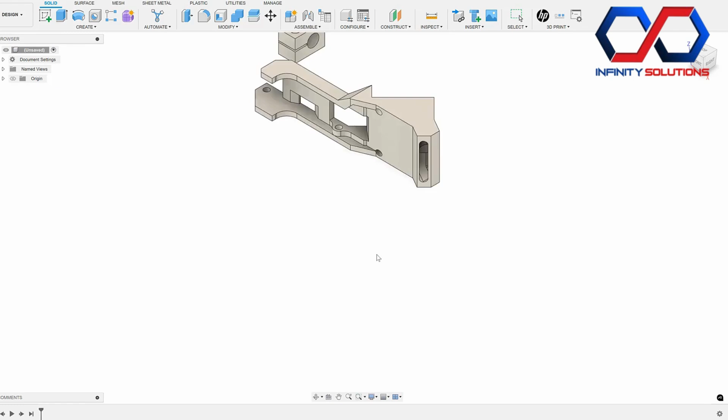So let's go ahead and start using the 3D Printing Essentials app to open multiple step files for this demonstration. So I have a handful of step files right here. So I'll pick these and hit open, and Fusion will open them in the location that they are designed. To make the visualization a little bit more appealing, I'll go ahead and turn on the component colors, so we have unique colors for every single one.

And to get a sense of which part is what, I will select this one to understand what part that is, and it looks like that is part C. So I will remember that as a part of my demonstration. And let's go back and revert the position.

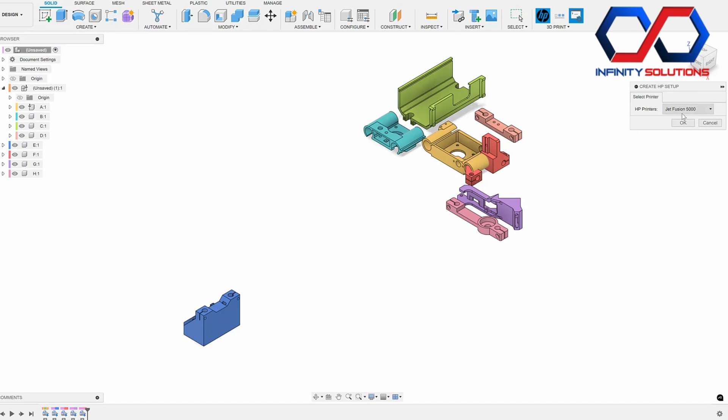So to create our additive setup, I will use the HP app and create an HP additive setup using a Jet Fusion 5000 printer. This automatically takes me to the manufacture workspace, creates an additive setup using that specific printer, and places the parts in that setup. What it doesn't do is it doesn't automatically arrange these parts.

In the past, if I wanted to arrange these parts, I would have to go to Arrange and choose one of the arrangement types, such as the bounding box, or the Monte Carlo, or even the 2D arrangement, and place these parts in the build volume. I had controls about the spacing between the parts, and a little bit about the pre-rotations, the initial rotations of the parts, but that's all the controls I had.

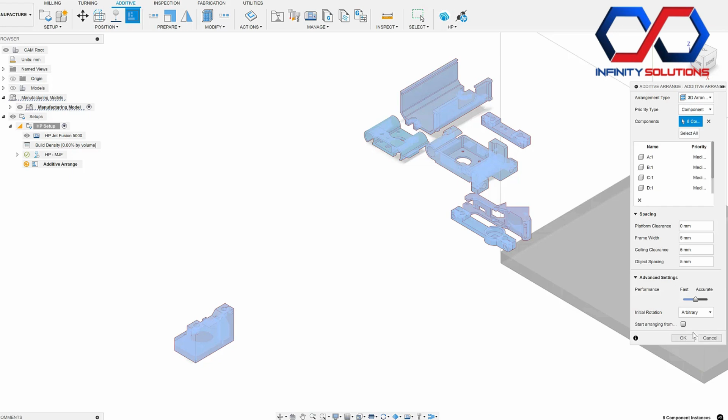And the outcome looked something like this, that I had placed the parts that I had designed into my build volume. I did not have control over creating duplications of parts or rotations of parts during the 3D packing process, which meant that if I wanted multiples of a given part, I would have to create those duplicates ahead of time and then use the packing algorithm.

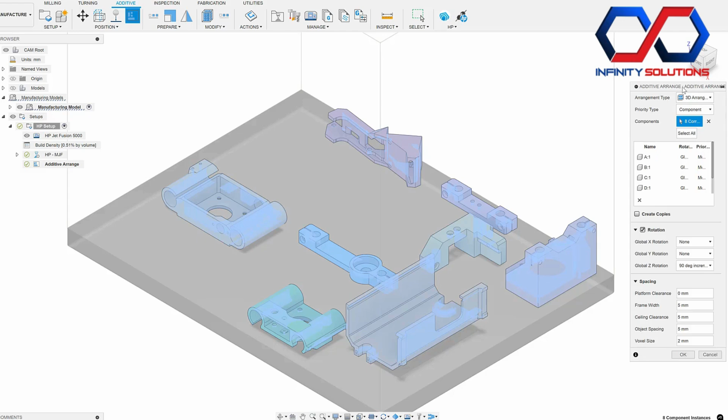Now, in this release, we have a new arrangement type called 3D Arrange TrueShape. This arrangement type is exclusively available in Fusion and has options that you can use to create copies and control the rotations. So let's demonstrate that. So the first thing is priority, and by default all parts have the same priority, but you can prioritize based on their volume. Then the highest volume object gets placed first during the packing.

For now, let's just go to individual component priority, which allows me to control the priority, and it's this part C that I'm interested in, and I'll increase its priority to high, which means it will get packed first. Next, I'll demonstrate the creation of copies. By default, let's say I want 10 copies of each part, but I can override a given part, and I can say, give me 30 copies of part C.

Simultaneously, I can control the rotation during packing, and I can try different rotations. I can say the parts are not allowed to rotate in X or Y, but they're allowed to rotate in Z with an increment of 90 degrees or any custom increment that I want. So for example, let's say 20-degree increments on Z is okay, but parts are not allowed to rotate in any other axes. I can also customize the rotations for a given part or a selection of parts.

So let's use this part C again as an example, and instead of using the global rotations, we will say custom rotation for that part. And I can also say no rotation for another part. So I can control the rotations of given parts explicitly. If I customize the rotation of a given part, I can select that part or multiple parts, right-click, and edit, which brings up a new dialog, which lets me control the rotations of a specific part.

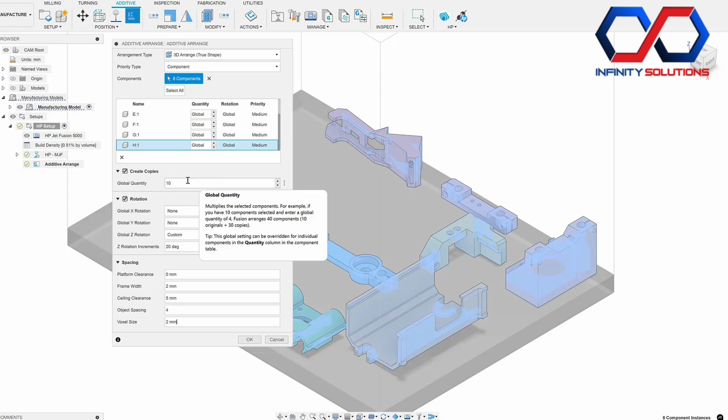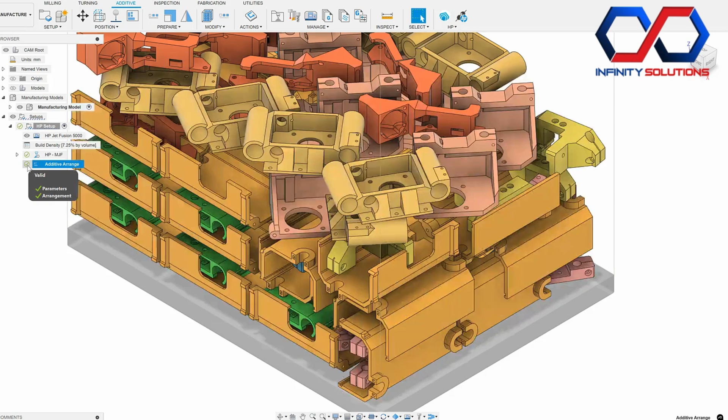So for now, if I go with these settings, remember we have 8 components as an input, but we asked for 10 copies of each, except for part C, where we asked for 30 copies. When we hit OK, we get the outcome when the additive arrange is complete. And we can monitor what's happening here. It's about 40%, 50%. And that's done. And that's what the outcome looks like.

So here we have these parts. We have multiple copies of each of them, 10 of each, and then we have 30 of the C. And all of them get added to not only the manufacturing model, which if we expand it we will see it, but they also get added to the additive setup, which is the setup object right here.

And if you want to learn more about the packing density and how many parts there are in this setup, we can right click and edit and take a look at our arrangement statistics, and we will see 100 total parts. And the density of this pack is 7.25 when compared to the entirety of the build volume. The highest location is 202 millimeters. So if we consider only the first 202 millimeters, which is the build height, the density is 13.64.

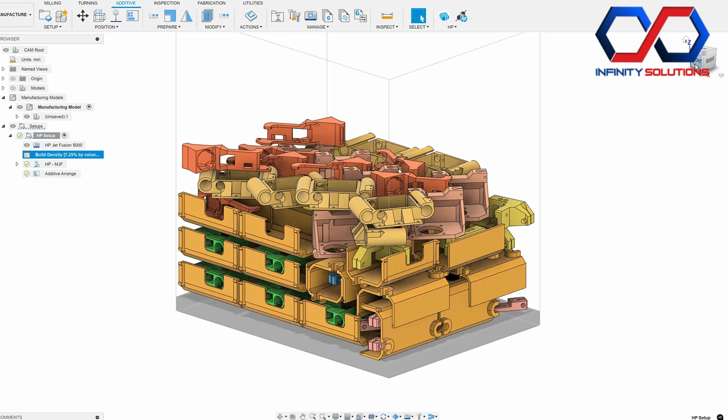So that is how we can pack our parts and control the quantity as well as the rotations during packing, and have a much better packing outcome using Fusion for 3D printing with machines such as Jet Fusion from HP, or SLS from other vendors such as EOS and Formlabs. This new 3D arrangement type is available to commercial users of Fusion and above.